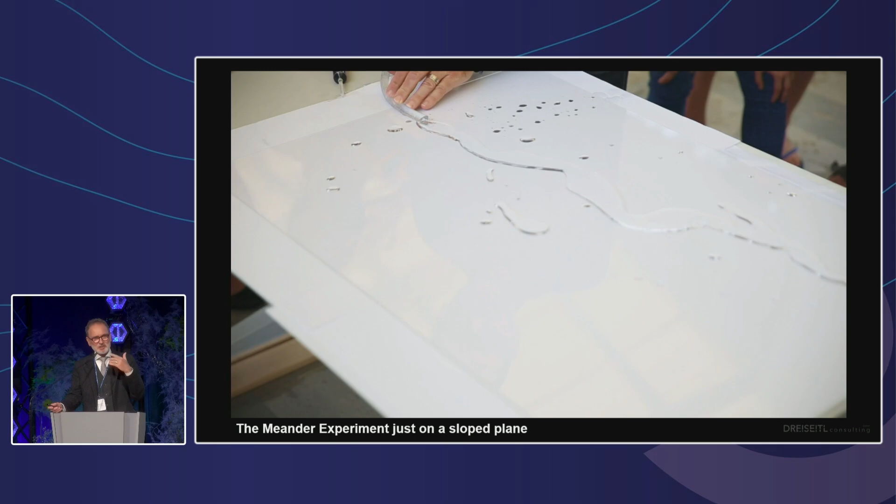I would like to take you on a journey, first not as typical engineers looking at data, but more to look really at water itself. I find it very fascinating to look at water in different landscapes and see how it behaves. Water behaves in a very interesting way. It's actually not going the straightest, always quickest way from A to B. It starts to make oxbows, it starts to delay, it starts to slow down.

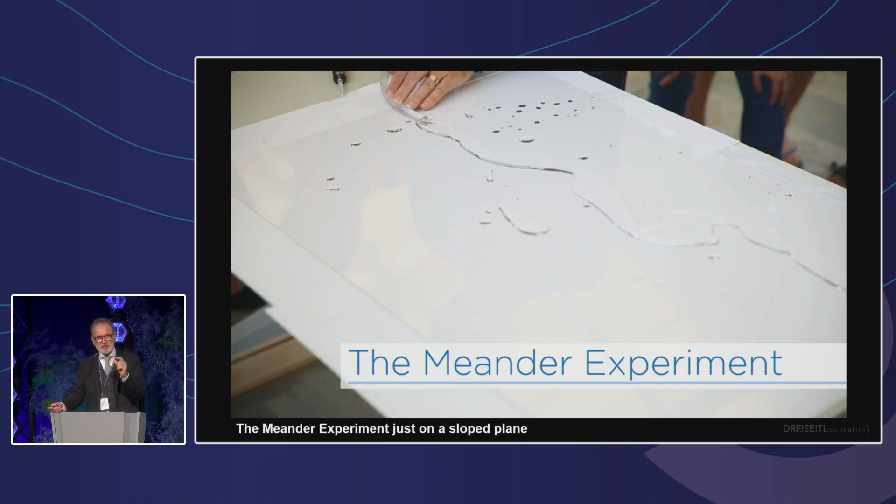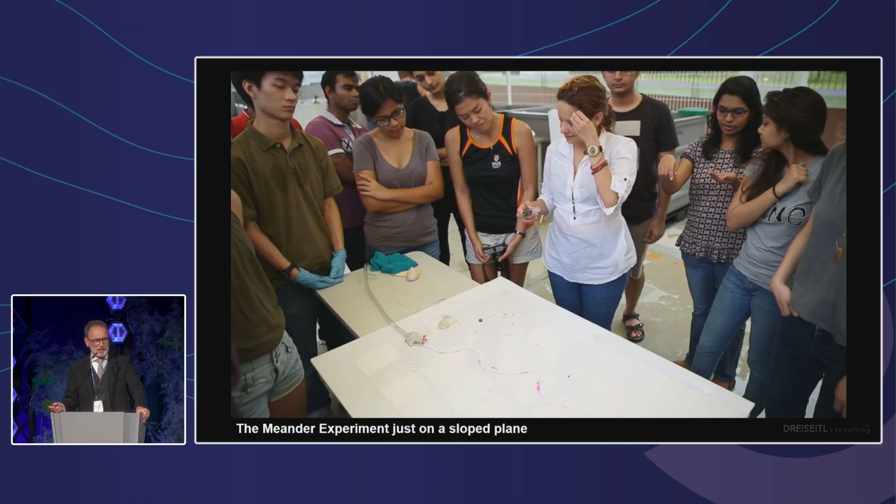It's actually even doing things like starting to go backward. It does all kinds of things which are so important in nature. For example, all our fish habitats need this diversity of flow in our rivers. I like to show these simple experiments to engineers and to my students, how interesting water actually behaves. And what can we learn from water?

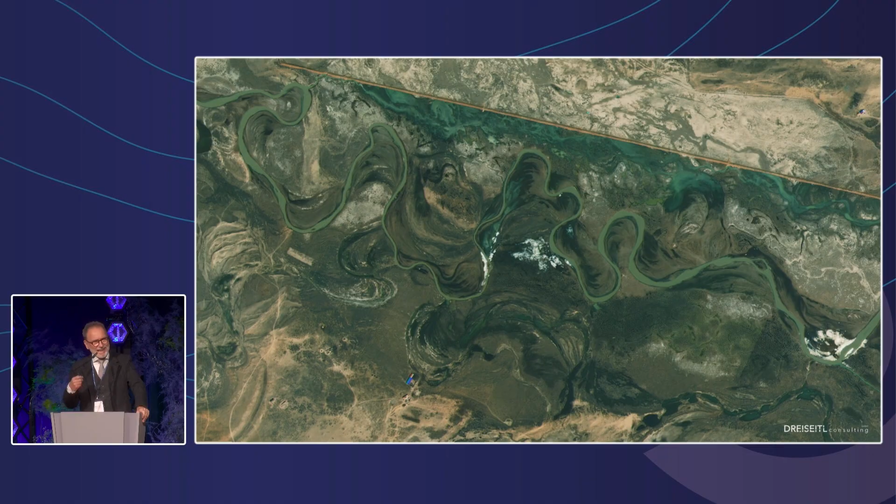That's why I'm not starting just with science, but really with art and design. How is water actually acting in a landscape? How interesting is what we can learn from water when we look at water structures? When we talk about sponge city, which is a funny name - I actually don't like it so much because it's much more than only a sponge - when we look at landscapes that combine water and vegetation, blue and green, how smart and intelligent is a self-organized system working? What can we actually learn from this kind of structure?

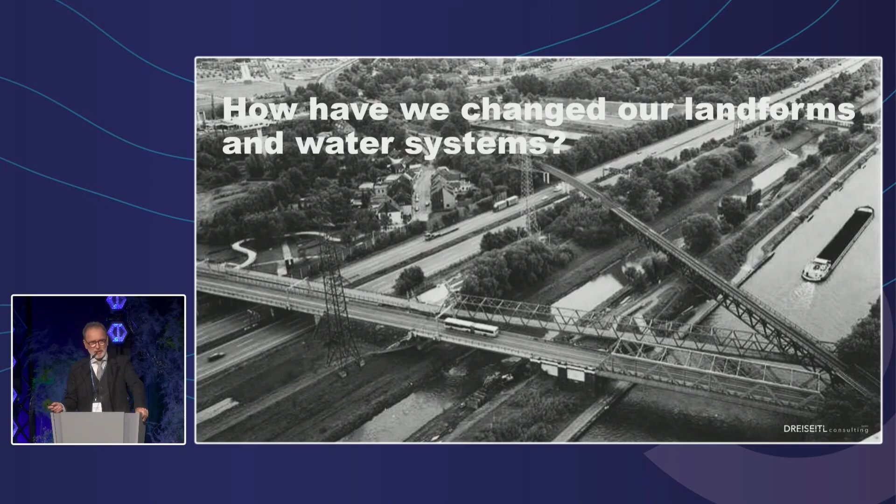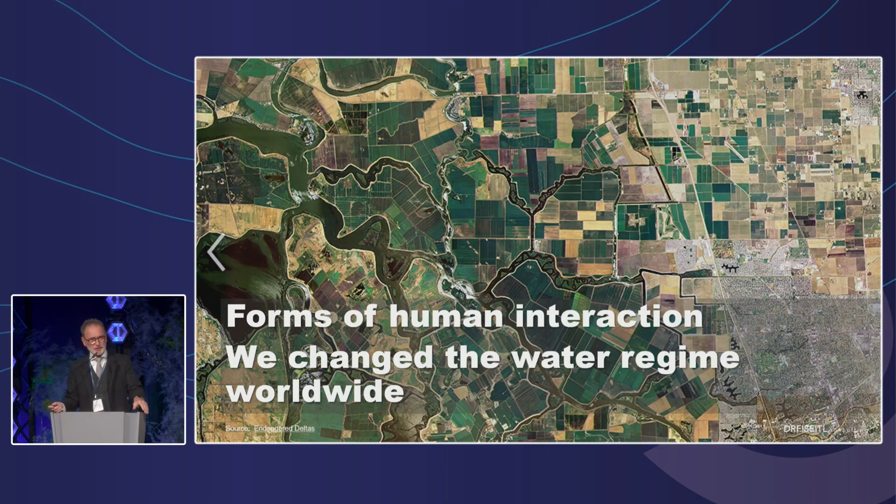When we look at our human world, what we created in the last 200 years with industrialization all around the world, basically we ignored a lot of this kind of wisdom of water, and we made everything straight. We made it organized, logical, fast, quick and efficient. We think it's efficient, but in the long run it's actually not. When we look at our cities and the urbanization going on, there is a consequence of that.

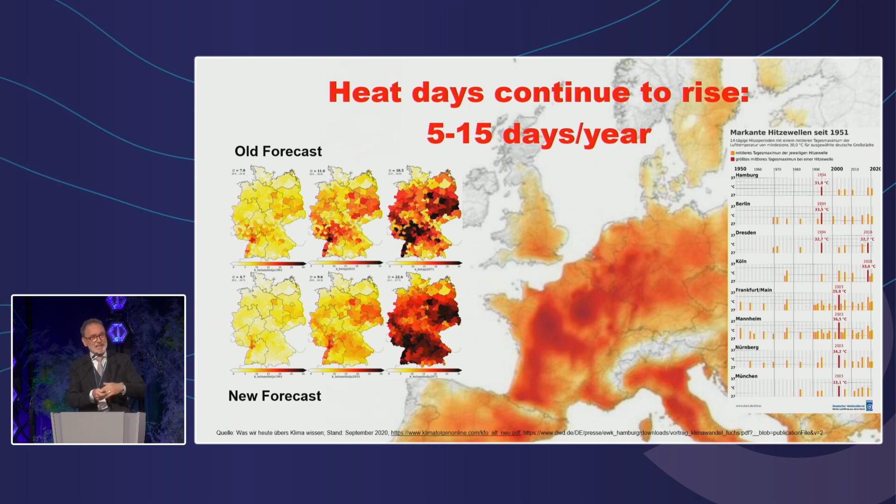I would like to share very briefly about climate change. When I look back on what we discussed about 20 years ago, the worst case scenarios we had in Germany, for example, are today not even the normal. It's always exceeding our forecast. When we look at all the data - you are probably aware of the Potsdam Institute for Climate Impact Research and others - we can see the extremes are coming up more and more.

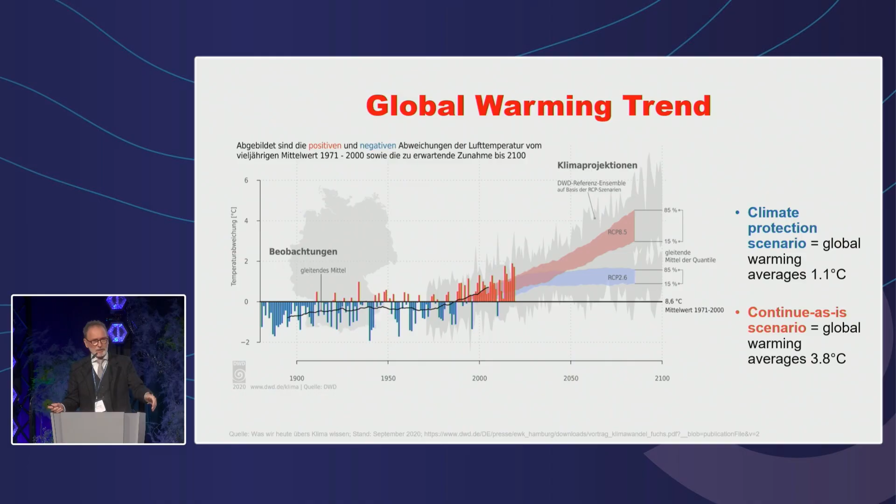And what are the extremes? It's not just that it's raining more, because the amount of water coming down is almost not changing so much, but the intensity is extreme. For example, we can see that in one spot we suddenly have a lot of downpour, like a cloudburst coming down, while on the other side, 5 kilometers away, there's drought, no water coming.

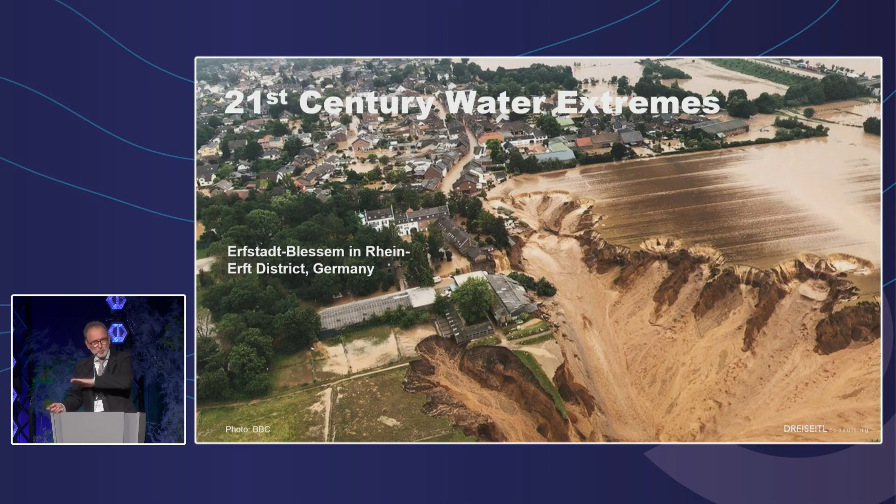When we look at places in Europe, unexpected but now more and more brutal, like the catastrophic Ahrtal situation in Germany - villages and farms wiped out, water took away all the land. In my own city, where I live on Lake Constance, in a beautiful area, our train station was flooded twice by a so-called 100-year storm event.

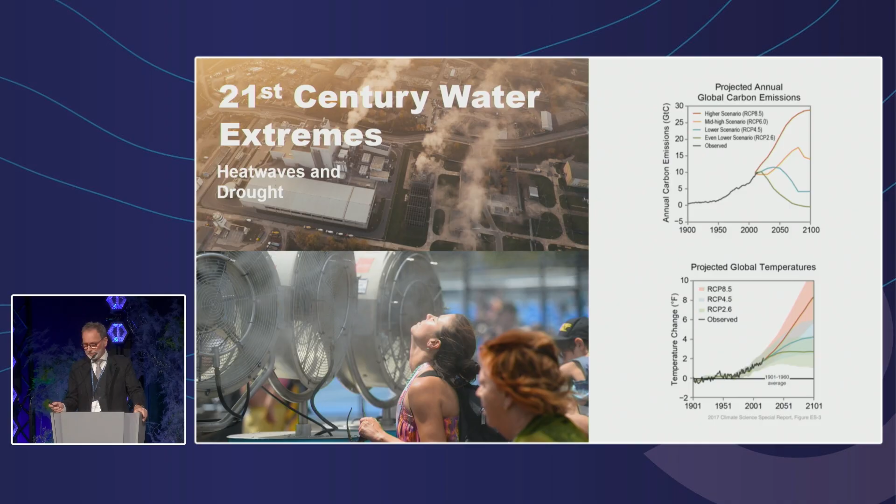No train could go. And on the other hand, we have droughts. The mayor just mentioned it, and the introduction from Thomas mentioned it very clearly: we have too much or too little. And the consequence of that means we have to think.

We really have to think: what can we do differently? How can we come up with new concepts? What can we learn, and how can we not only repair a problem but also create new values? Because there's also an economic side to it. Sponge cities - and 'sponge,' just to explain a bit how this word came about - started actually in many places, and the Chinese used it to make it simpler.

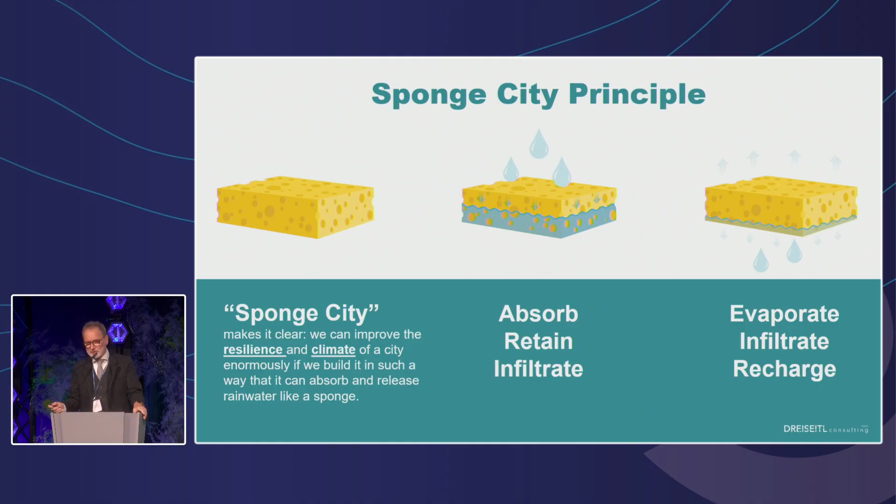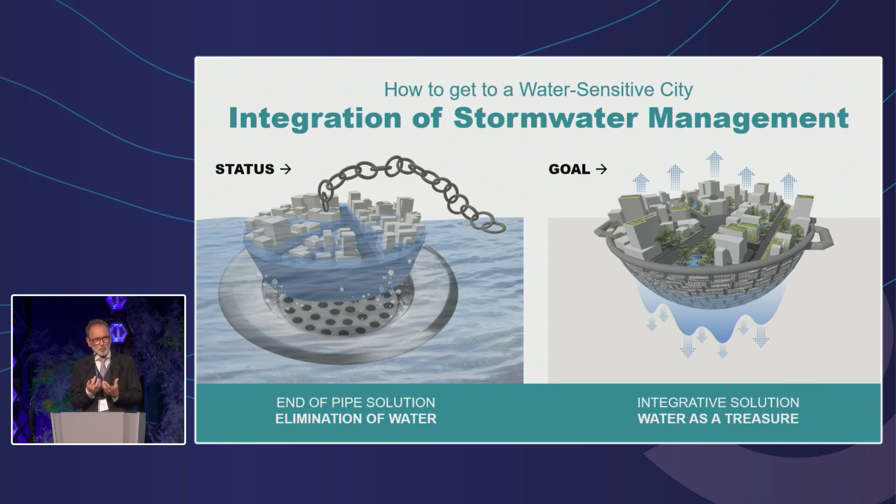It's basically to hold water back, to suck it in, to evaporate, to infiltrate. And it's very much about thinking about cities in a different way. Instead of getting water rid of as quick as possible, to see the city as a kind of organism of water, a water sphere, which can hold the water back. And it's very much about repairing what we have in our cities by thinking about what nature actually does.

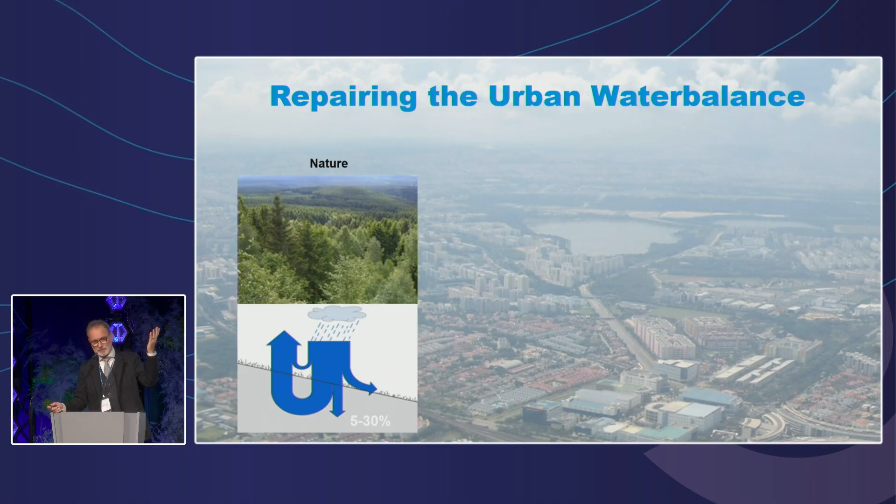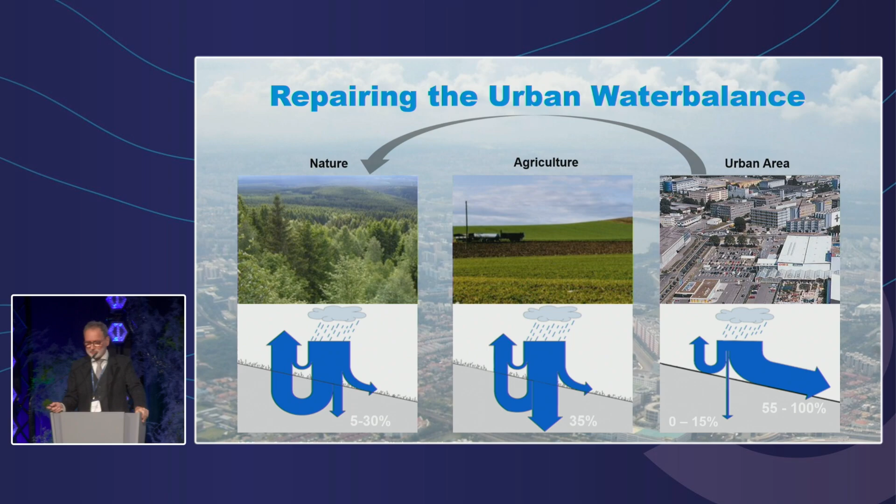If we look at the natural environment, most of the water is evaporating. Very little is actually running down. Quite a lot is infiltration. Agriculture is changing. If we look to urban structures, everything is actually going out very fast with all the pollution we add on the water. And we have to find a way to make it more intelligent and more smart.

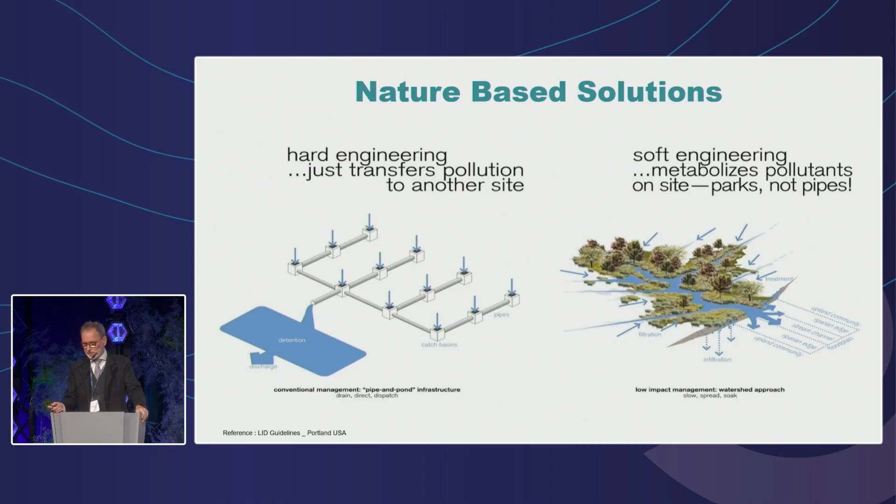A lot of countries around the world have seen this problem coming up. In America, they called it low impact development. It's basically all the same, bringing nature-based solutions or technology which we copy from nature back into our cities to make them more smart, more intelligent, more water resilient. And it can be done on many different scales. I would just like to share some examples because it's very important. At the end, I would like to give you some key points about what we can learn from all this experience and what you might be able to continue.

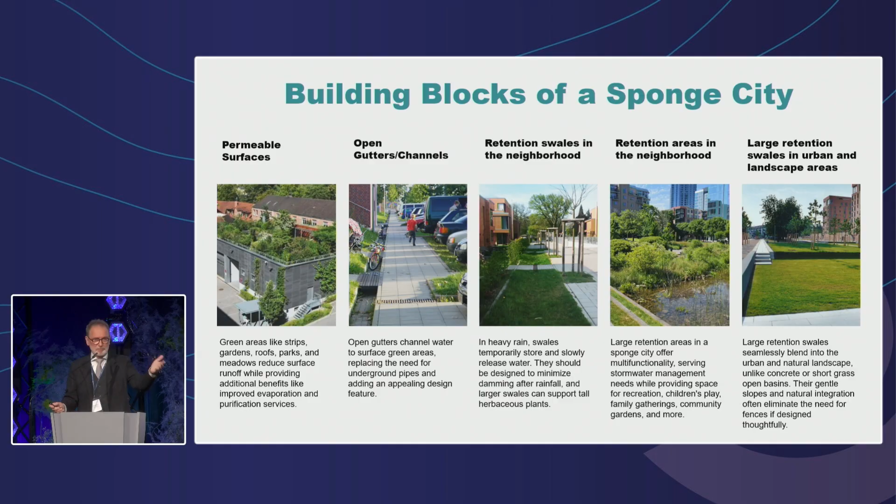There are lots of tools we can use. Basically, all the different techniques we have to filter, to store, to hold back, to have retention facilities, to have green roofs, to have swales in cities to hold water back. They have basically two reasons. One is to balance the water, to hold it back, to store it, to keep the quantity controlled. And the other one, which is equally important, is to control the quality. Because we can do a lot decentralized already to clean the water, to filter, using all this material we have in the soil with microorganisms to digest all the pollution we have basically in stormwater.

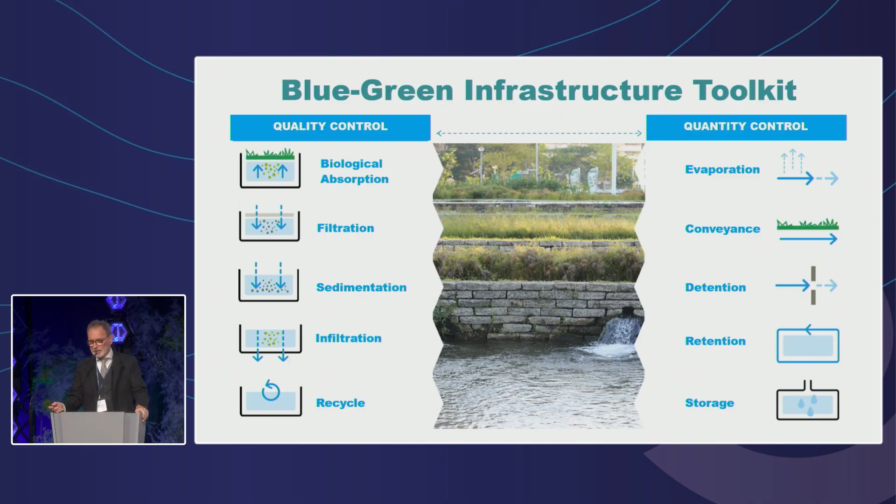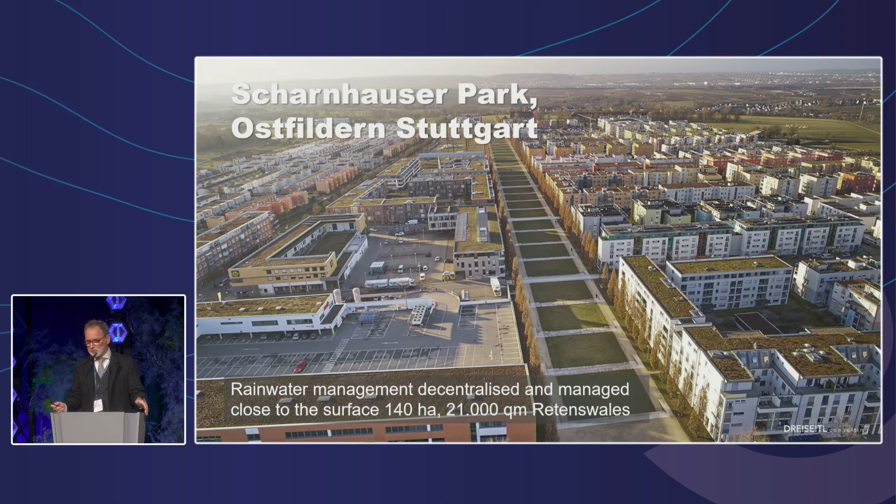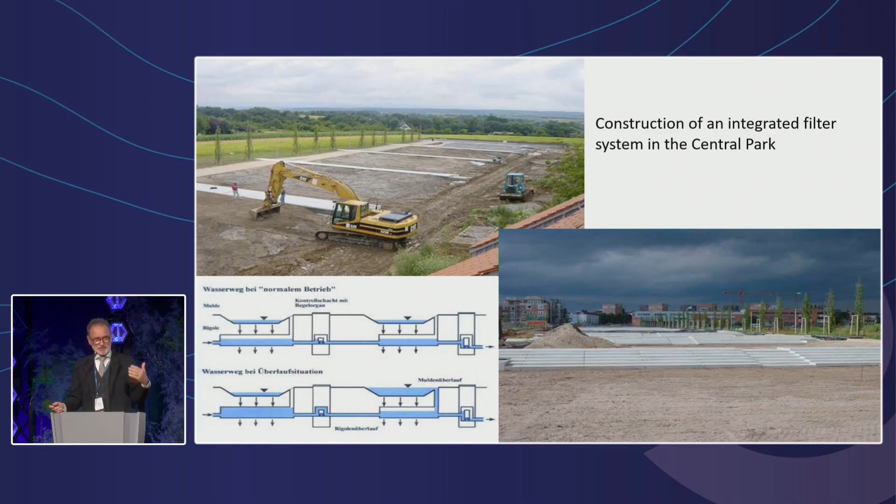Basically starting where the rain hits the ground - that is the first action point where we can already do something. With vegetation, with green roofs, with swales, to collect the water maybe on the surface, not to let it hit the ground too much, to keep it relatively with little gravity on the surface, to hold it back on kind of cascading swales. When they get flooded, you can control a lot of stormwater and hold it back. This is actually a photo I got of a 100-year storm event in 2002 in Stuttgart, where a lot of places in Stuttgart were flooded, but nothing in this area, because we could manage it.

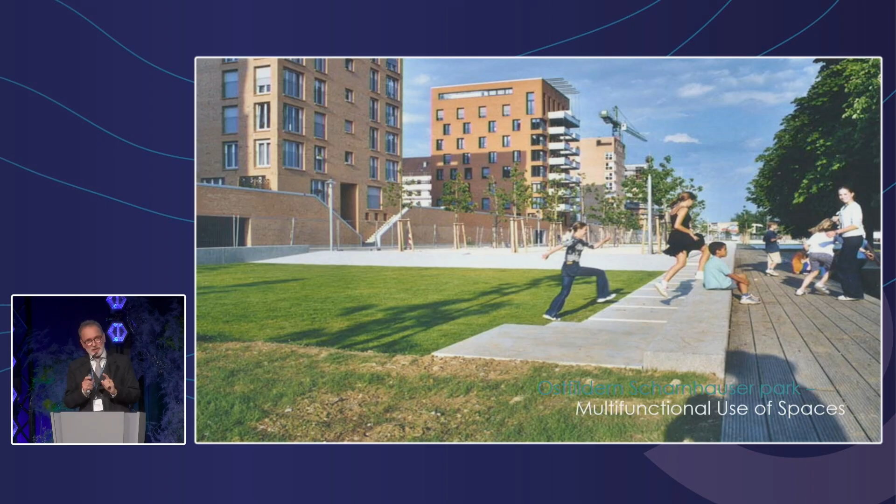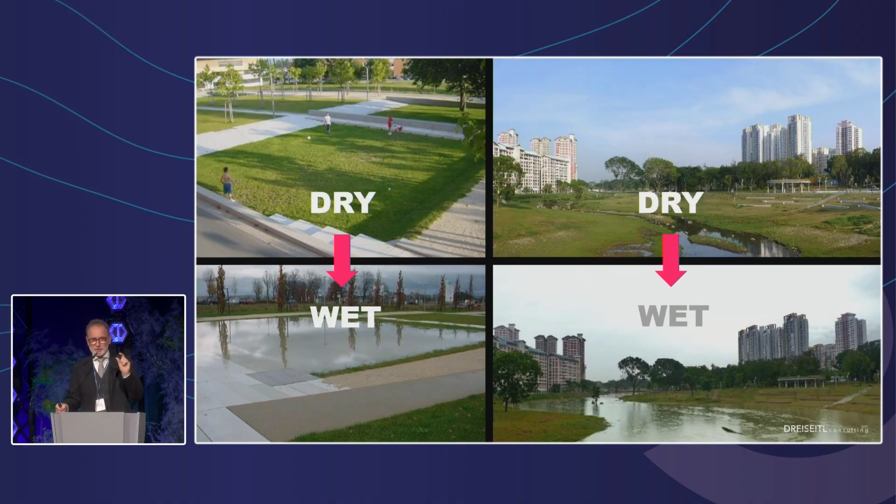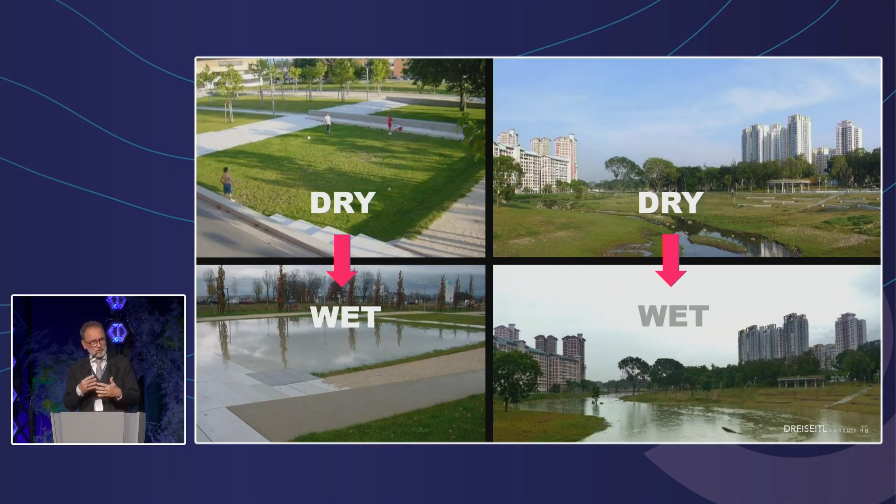Or to do it in a way that it's not only a reservation for stormwater management. The added value is it can be a playground, it can be anything else, but it can also be a retention facility. So that is a very important part, I think. What we have to learn as engineers or as planners is that we always have to see it multifunctional. We have to work with different disciplines, with city planners, with traffic planners, with landscape architects, with engineers. Everyone talks about it, but it's very hard to do so. It's a learning process and a learning curve which is still on the way. We have not actually, to be honest, found the final result yet.

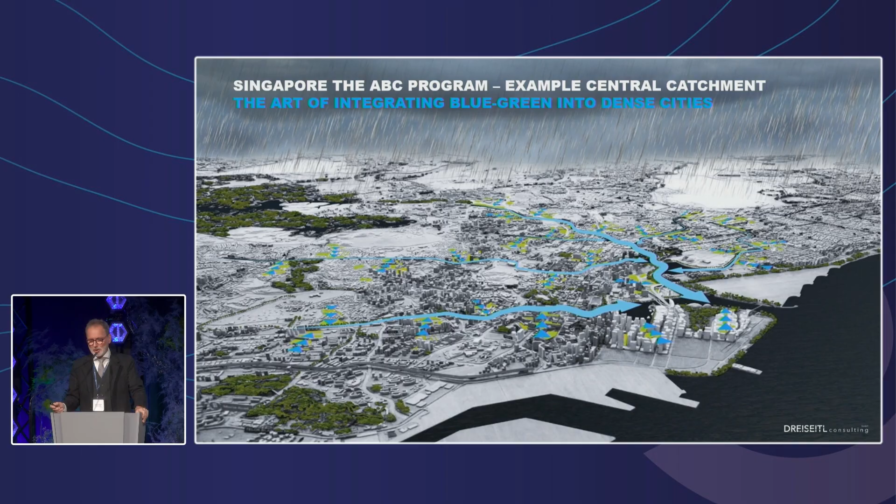Some cities are doing better, and I just showed some examples. Copenhagen, for example, the cloudburst concept - we worked on this a long time. Hamburg, the RISA project. There are many other cities as well. I take here as an example the city of Singapore, which is very much in demand of keeping water and holding water back. And it's actually very much what we are trying to do here - not to have a single project, but to have a network of lots of opportunities to handle stormwater in the city. And that actually has to be any opportunity. How to convince government organizations - it's not just about a mayor being convinced, you actually need the population to be convinced to give you political support and also finally financial support.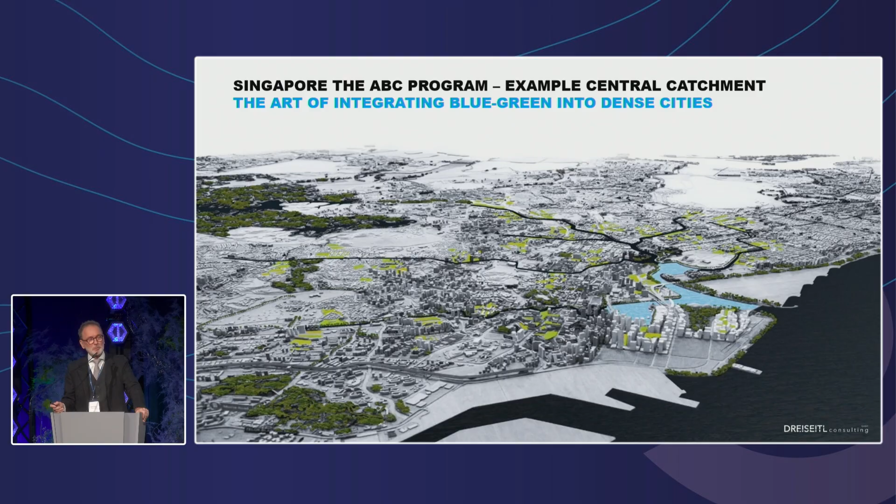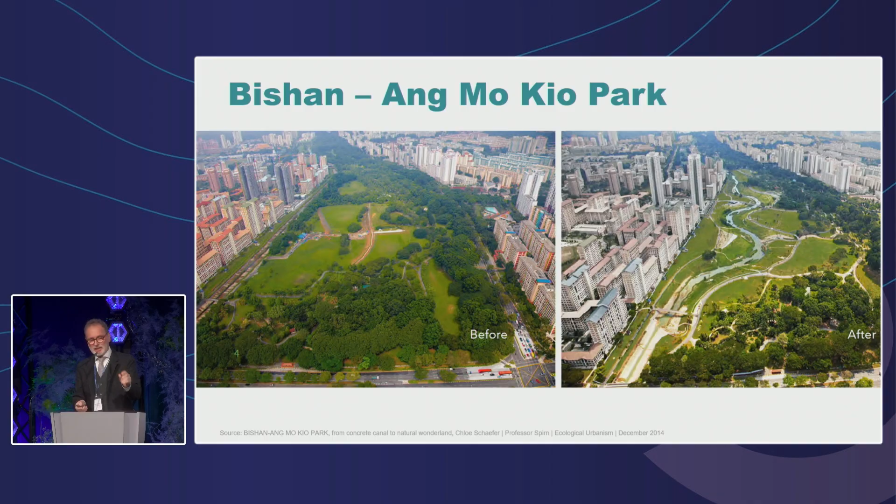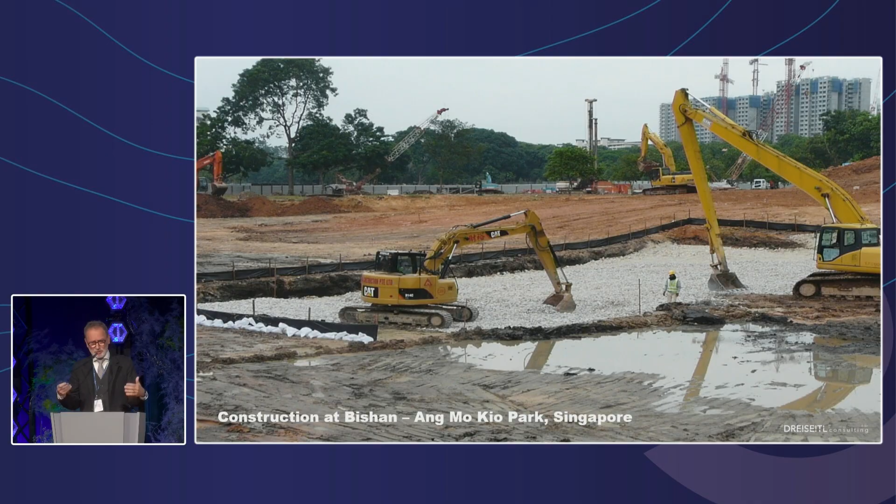It's very important to do pilot projects. One of the pilot projects I was working on was Bishan-Ang Mo Kio Park in Singapore, basically a green park, a very boring park with basically a canal, a main canal where water is shooting out into the ocean. We changed it completely and made it a kind of stormwater park to keep the water in the facility, in the park.

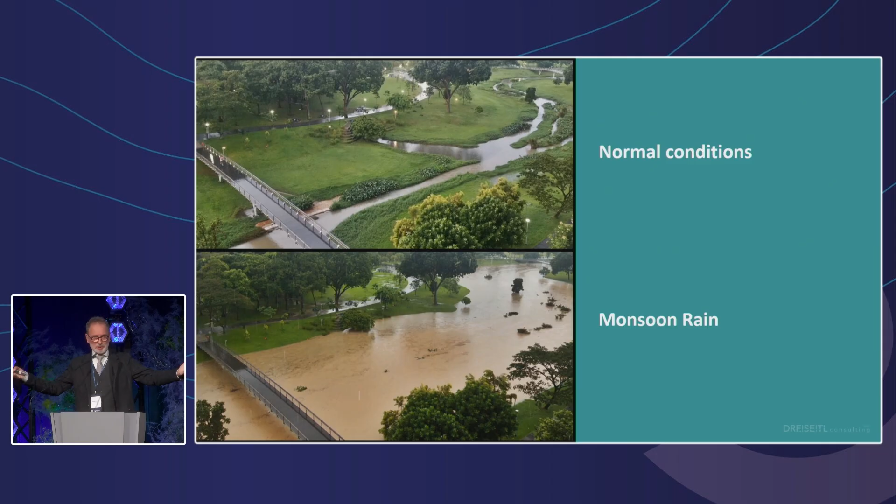When it starts to rain, this area can be flooded, and it's actually working like this: when there's a lot of rain, this area can keep the water, and when it's dry, the water goes down, and you can use it again.

Sounds very dangerous. Yeah, and we discuss a lot about danger, and actually you can imagine in Asia, in Singapore, they are even more hysteric than we often are in Europe.

But it's interesting, it's not dangerous, because when it starts to rain, water goes up very, very slowly. There are warning signs, there are places where people actually step out and keep the place for water. That's another learning thing.

We should not, in the future, because of all the dramatic situations we have with climate change, guarantee always that we put everything underneath in pipes. We have to find ways to say that in extreme conditions, even a road can be flooded, controlled in a way so that we are safe and that it doesn't flood other places like houses or damage buildings and so on.

And it can be done on a small scale or a large scale. Jakarta, for example, has lots of problems in the city, but they're starting to go this way too.

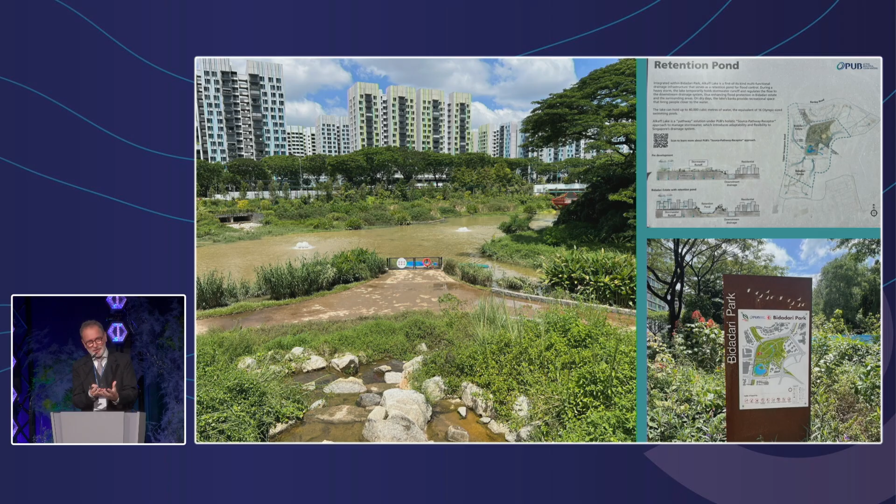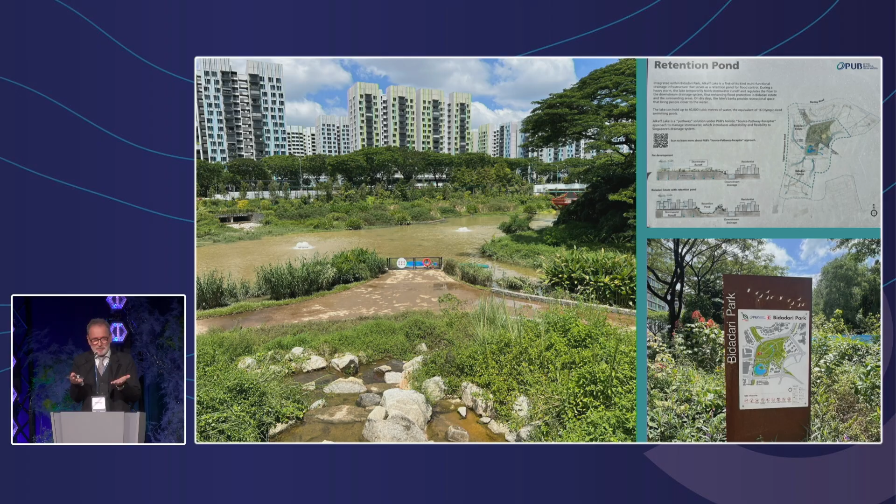Another example is in Singapore, where it's in the public domain. From all the neighborhood buildings and streets, the water gets into one park where there's a water lake in the middle. Most of the time it's almost dry, but when there's a big storm, the water level can go up, buffer, and then slowly and cleanly go down into the rivers and streams.

It has to be very, very well communicated with the public. Everyone has to learn why we have to do this - how can we have a better partnership with water in a city?

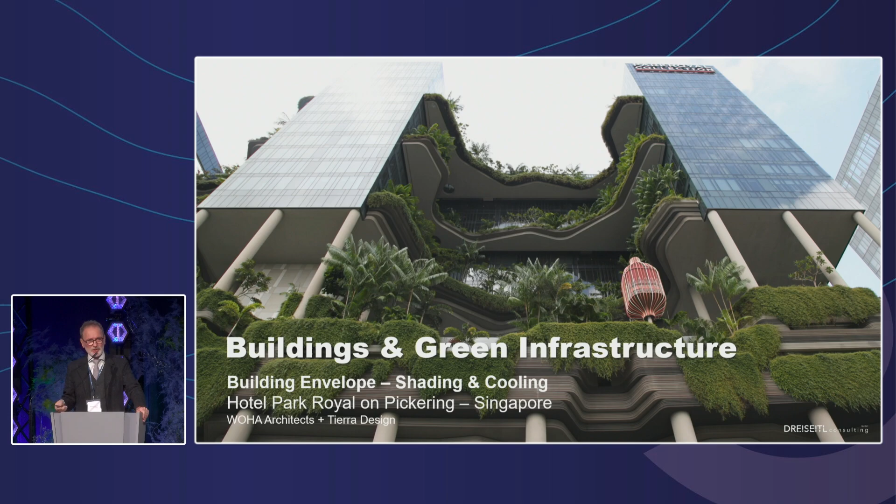In Singapore, we call it the ABC Water Guidelines, and even a taxi driver should be able to explain the system to a foreigner - and it works. Architects can also do so much more, working on green roofs or structures. When you do it right, you can activate city planners and architects to come up with better solutions to make really interesting hotels that keep the water back.

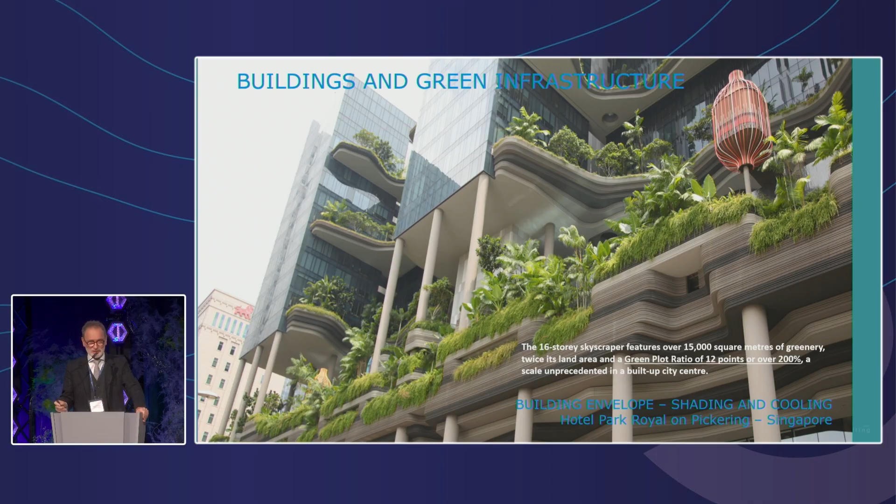But now I go back to Europe, because you might say this is a dreamer's vision - that somewhere it can be done, but not here in Poland.

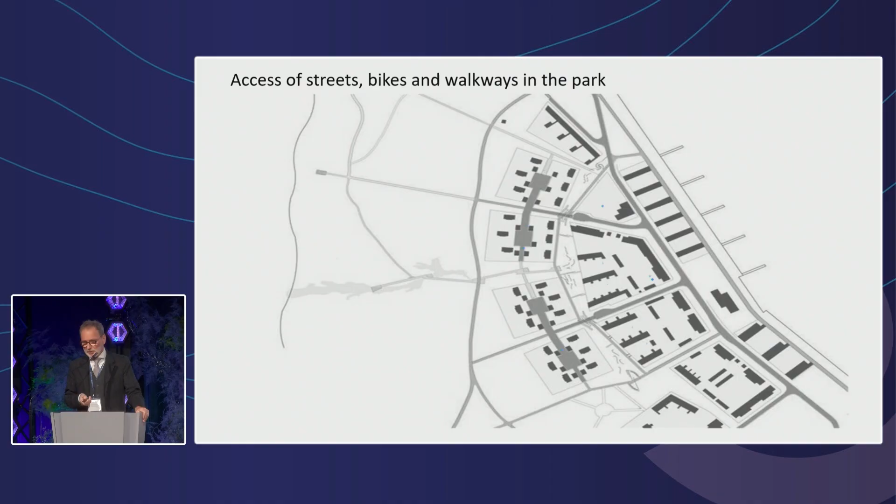I'll show a very extreme example now, in Finland, in Oulu, far up north, a little bit south of Rovaniemi, with very cold winter conditions - the same system. We capture all the water in a new housing estate, in green areas and corridors where the water can be filtered and brought in, and only if it's a big storm does the water run out on the surface.

Of course, it works in winter as well. Winter conditions are always an interesting point, but water runs off when it starts to melt. The difficult part is always between freezing and melting.

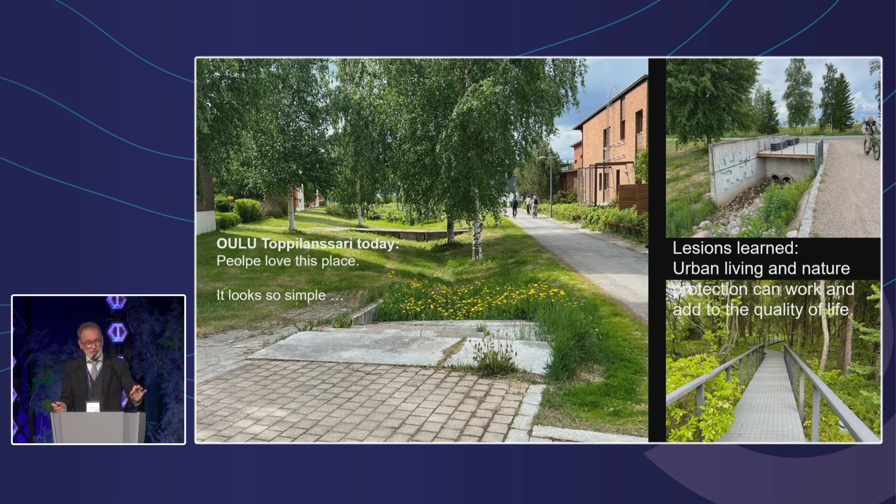We can maybe discuss this a little more. We had very good examples, very good experience there, and people really love it. It has to be simple and beautiful so that people can accept it.

We can also do so much more on our highways and roads. We're working on different scenarios on big roads, for example in Europe on highways, to treat the stormwater runoff from the street, to filter it with biofiltration and swales where particles can be filtered out. It can be very, very efficient - that's the way to go.

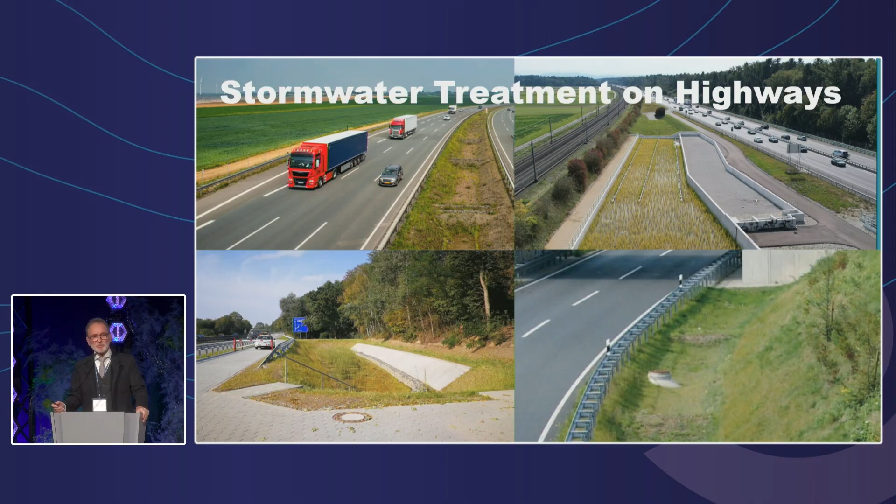Finally, I'd like to show some examples in a denser city situation. A very interesting example was when we united East and West Berlin at Potsdamer Platz - we had the opportunity to work with water in a different way.

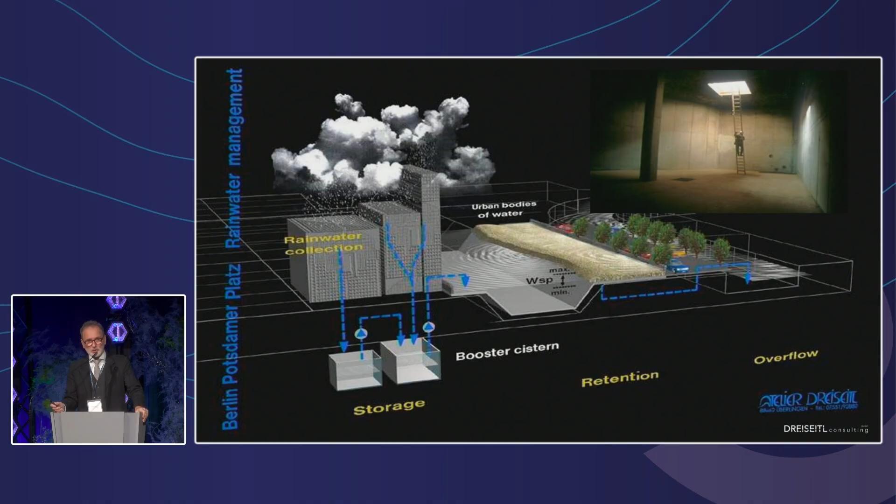What I was very keen on was collecting every drop of stormwater on the site, cleaning it, storing it, and even recycling some of it. We have big tanks in the basements - kind of basement areas with car parking and leftover corners that couldn't be used for cars - and we could bring the water there, recycle and reuse it for all the irrigation we have on Potsdamer Platz in Berlin.

It's basically an open basin, and I don't want to say this is a model that can be done everywhere - it's an extreme example. But it's about using the challenge of rainwater and stormwater as an opportunity to create added value for a city.

Today it's a very attractive place. Water is shown, is celebrated.

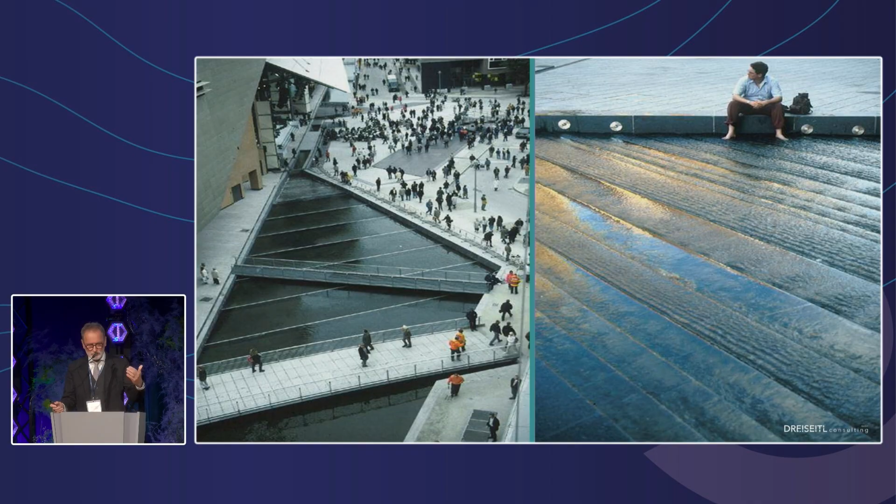Of course, we have filter systems included to get rid of nutrients and phosphorus in water. And we also save a lot of drinking water by recycling on that.

I'll go even a step further, because this can also be done much more in industry, where we often have big surfaces where we collect water and just get rid of it as quick as possible. What a waste of resources. If we can recycle and reuse water also from big areas on industrial sites, we can do better.

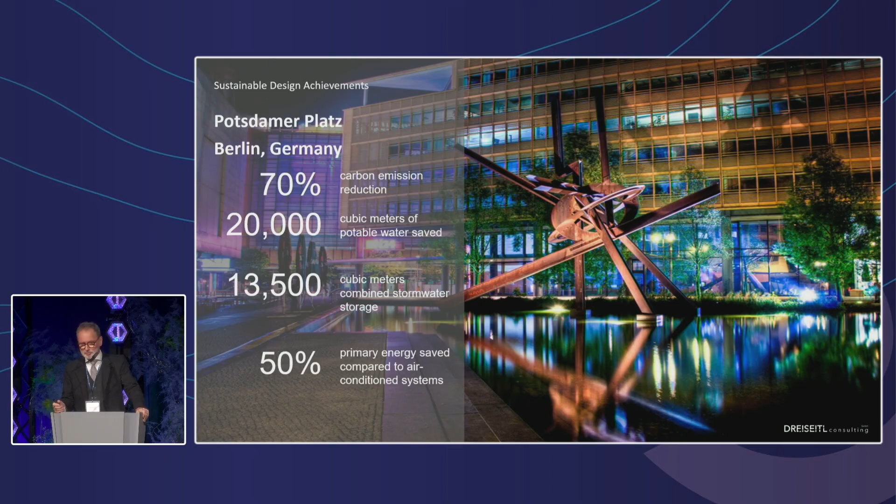I'll show an extreme example. This is for the car factory for McLaren in Woking, where I had the chance to work on experiments with Norman Foster's office. What we do is collect water from all the different rooftops and bring it into a kind of buffer cistern, circulate the water, and use it as a cooling system for the entire plant. So the factory's energy and heat load is actually brought out by cascades, bringing technique and aesthetic together. This is the overview.

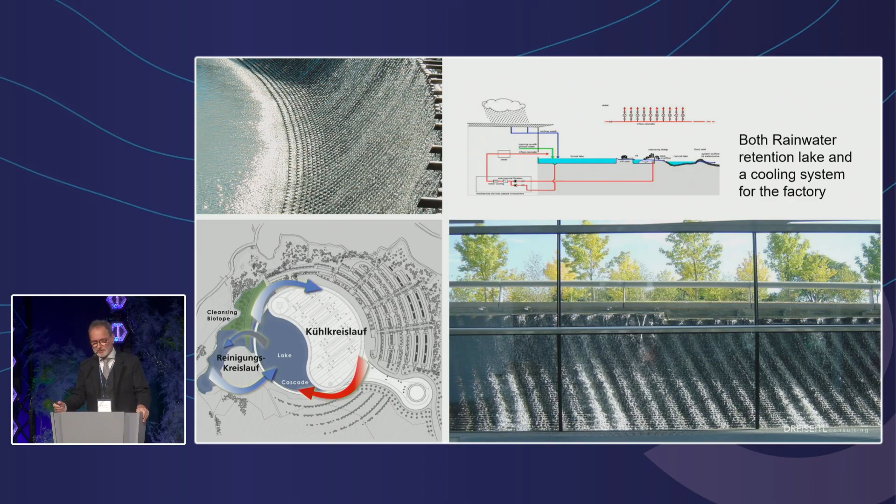We also collect the water from car parking, to collect the runoff of car parking, filter it, treat it, and recycle and reuse it.

Maybe at the end I'd like to show a bit more in a more dense, existing city. If we have the opportunity to restructure or renovate a city, stormwater treatment and sponge city solutions should come in right from the beginning, and it needs a kind of strategic plan.

Portland, Oregon was one of the first cities in the US. I was actually working a lot in Portland on the main concept, and we had some pilot projects, and one I'd like to mention here is the Tanner Springs Park.

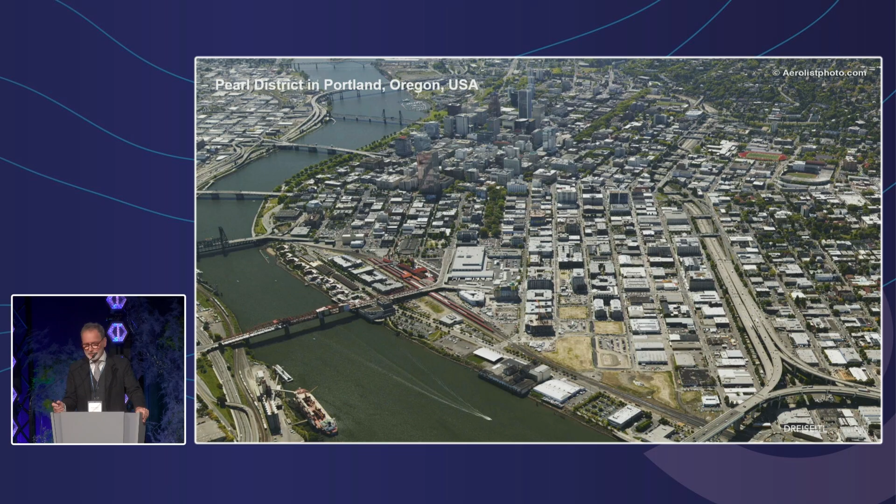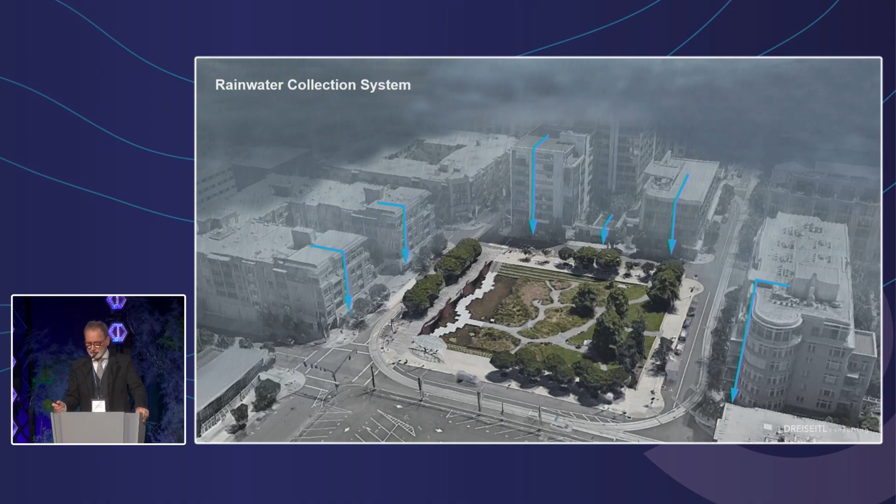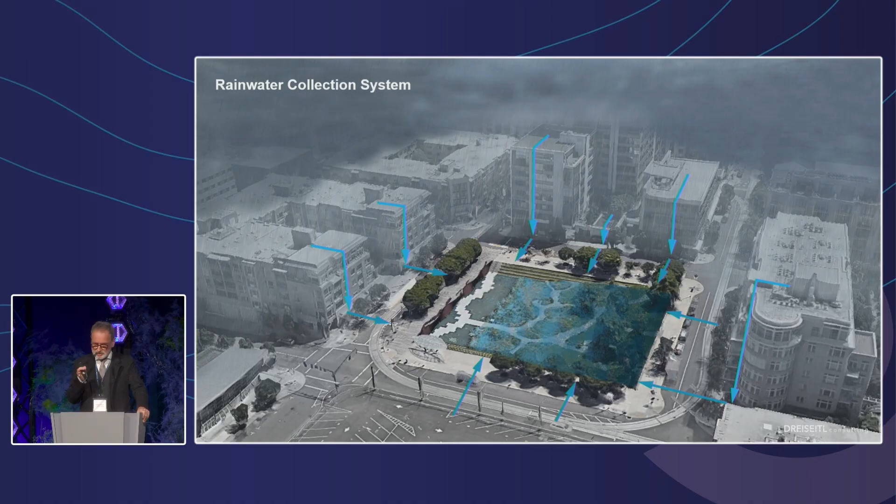Basically what we do on this one plot in the city is collect water from rooftops, from streets, from sidewalks. We bring it into a kind of multifunctional park, which filters and treats the water as a kind of filtration and cleansing system. Then finally we store the water where the level can go up and down, and some of that is also circulated, and then it goes down into the river.

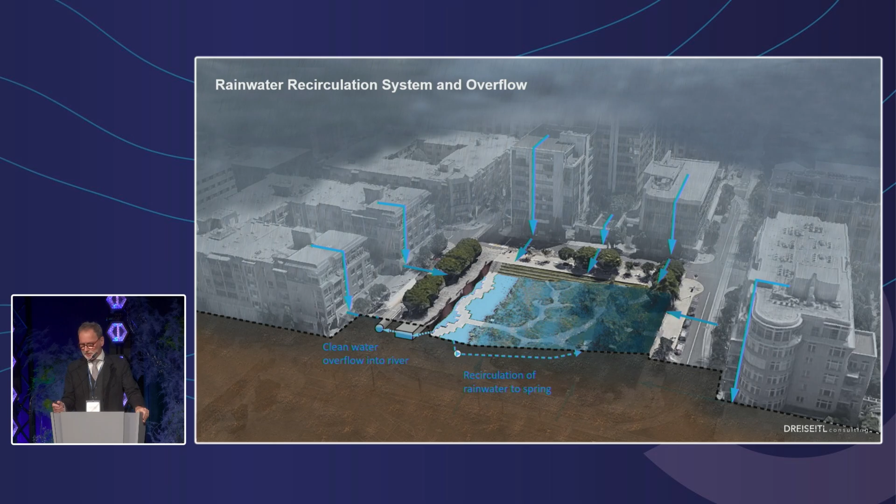To do such things in the city, you have to get the population involved. So participation, talking about stormwater solutions with the public domain, with people, is extremely critical, extremely important. People are willing to follow because everyone understands that climate issues are getting more and more extreme, and we have to do something now, but also for future generations.

So this stormwater park and treatment system is more than just a treatment park for water. It's also an interesting space where people can enjoy themselves. It's a park, people can go there. The water level can go up and down, so sometimes you cannot use it, but other times you can. I'd like to end my presentation with three slides on some findings, which I think may also be interesting for this conference, because I want to give it more like a keynote opening for further discussions.

I think one very important point is about policy making. These slides and pictures all look nice, and everyone thinks it can only be done somewhere where people have a lot of money. But that's not true. It can be done everywhere, and it is not a matter of being rich. It needs a strategic plan. It needs a very clear vision for a city. Where do we want to be in 20, 25, or 30 years from now?

All the successful cities working with stormwater had a plan for the next 20 to 30 years - Copenhagen, Vienna, Singapore, New York City, Portland, and others. They put this on a very high agenda, a long-term vision plan.

Secondly, you need to have pilot projects, and pilot projects actually have to be in front of your doorstep in the city. Because I hear this argument all the time: yeah, it can be done there in Finland or in Singapore, but not here, because we are different. Everyone says the same thing. That's why you need something close to your place, or a good example, for instance in Poland, where you can say, that's how it looks, that's how it's maintained, that's how it performs. And that's actually very important.

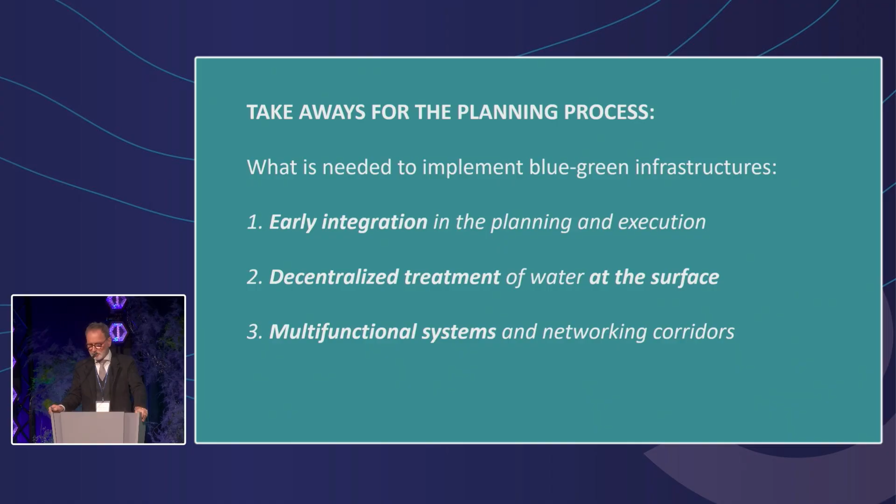Finally, maybe just to take this away, is the management and basically the responsibilities of that. That's also a very important part, because often maintenance and responsibilities are very strictly organized in silos in our normal business. And when we work with stormwater, and the examples I have been showing, there's always a kind of overlapping.

There is an overlapping, for example, of maintenance service on roads, on parks, and on stormwater. It has to be sometimes the same company, it even has to be the same team, and they have to be financed from different sources. And all that has to be extremely well organized and needs new concepts.

Another point is that all these topics I'm trying to show always go from private property to public, and never the other way around. Otherwise, you get into trouble.

Maybe finally, to talk a bit about responsibilities and financing—I think I just mentioned this as a very big topic which has to be worked out right in the beginning, early on. These are often the biggest discussions where projects don't go forward. I think we have to be very much aware of that, and it needs clear leadership from the city. That's why these vision plans and very clear strategic plans are important.